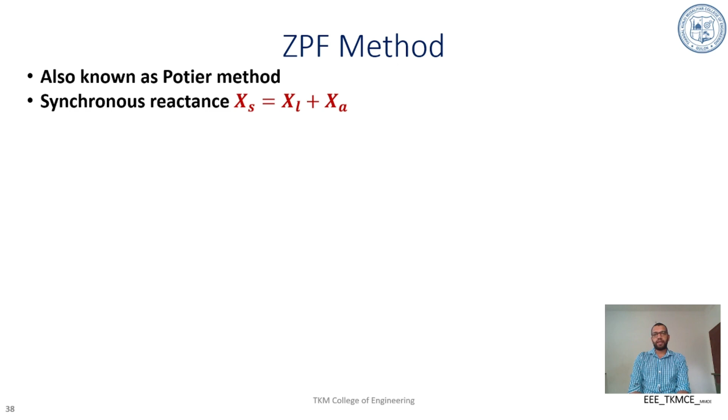We know in an alternator, armature current generates armature flux, and this entire armature flux does not link with main flux. The part of flux not linking with main flux is known as leakage flux. As armature current is time varying, leakage flux is also time varying, which induces a self-induced EMF in the armature, and this self-induced EMF opposes the actual induced EMF. Therefore, net induced EMF decreases.

Thus, leakage reactance represents an EMF concept because due to the presence of phi L, an EMF is induced. That induced EMF is N into d phi L by dt, which equals L into di by dt, which equals omega L into I. This is the induced EMF due to leakage flux, which opposes the induced EMF. This opposition creates a net reduction in induced EMF. Therefore, leakage reactance represents an EMF concept.

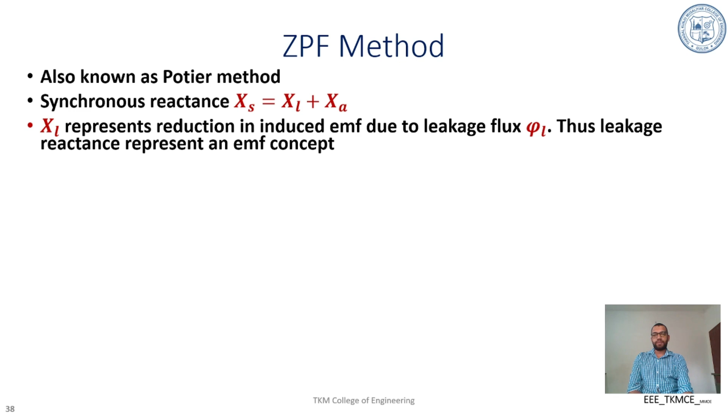XA represents a fictitious reactance to consider armature reaction effect. In motor or generator operations of a synchronous machine, armature reaction creates a voltage phasor, say EA, and that phasor EA and IA resemble the characteristics of a pure inductive coil. So armature reaction effects can be considered by means of a fictitious reactance XA.

Since the effect of armature reaction is either to increase or decrease MMF or flux under different loaded conditions depending on power factor of operation. Under lagging power factor, net flux decreases due to demagnetization. Under leading power factor, net flux increases. So the effect of armature reaction is to either increase or decrease the MMF, so XA represents an MMF concept.

Synchronous reactance of the machine contains two parts, XL and XA. XL represents EMF concept, reduction in EMF, and XA represents reduction or increase in flux, that is, XA is an MMF concept. In EMF method, XA is taken as additional leakage reactance, therefore excess synchronous reactance becomes an EMF concept. That's why this method is termed EMF method.

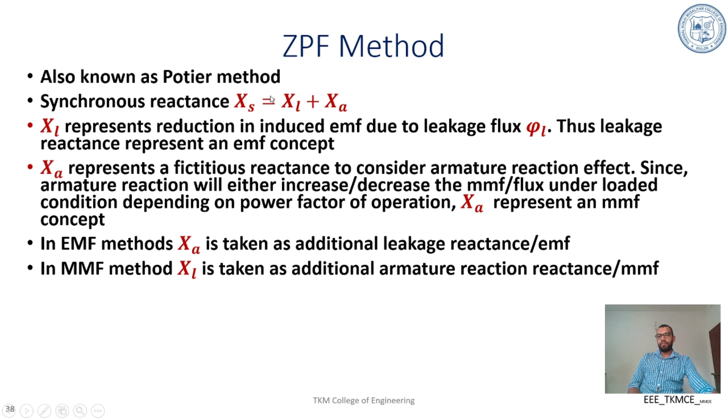But in MMF method, XL is taken as additional armature reaction reactance, therefore the excess becomes an MMF concept. But in ZPF method, we combine good aspects of EMF and MMF methods. Here, XL is treated as leakage reactance as it is, considered as an EMF concept, and armature reaction effect is considered as an MMF concept. This method separates armature leakage reactance and armature reaction reactance effectively, therefore giving more accurate results.

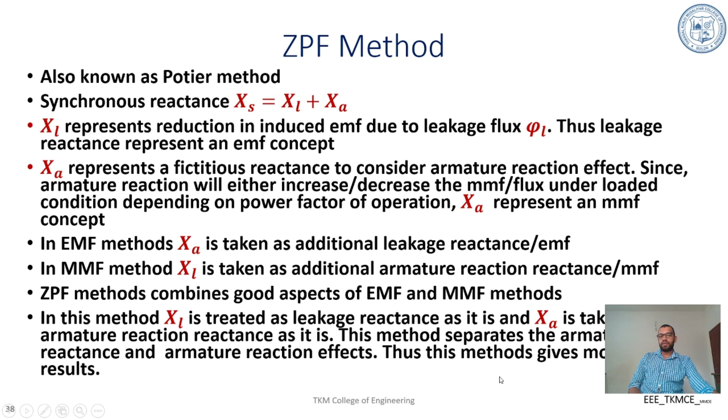Coming to the steps followed in ZPF method, we need to conduct three tests on the given machine. One is open circuit characteristics, giving variation of no load induced EMF with respect to field current at rated speed. Second test is ZPF characteristics, where we plot variation of terminal voltage with respect to variation of field current while delivering rated armature current under zero power factor load condition. The third test is to measure effective armature resistance per phase.

Based on the data available from these tests, we need to draw open circuit characteristics, ZPF characteristics, and air gap line. First, for better understanding, let's draw the phasor diagram of alternator under lagging power factor condition to generate internal induced EMF E dash. Here V is the rated terminal voltage, I is current lagging by angle phi, I into Ra which is in phase with I, into XL which is leakage reactance drop leading I by 90 degrees, and this I into XL we can directly obtain from the Potier triangle. The sum of all these voltages gives E dash.

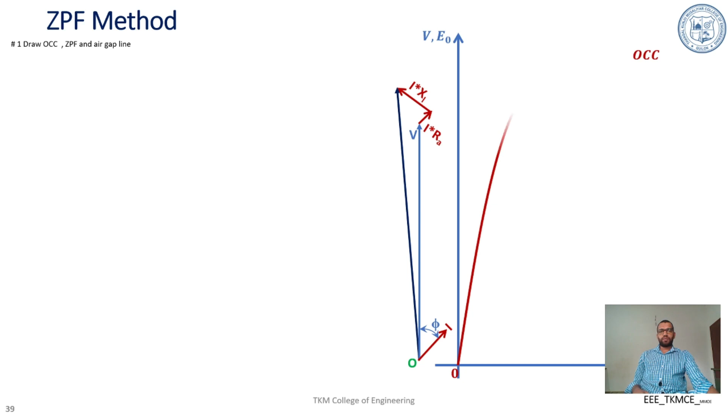Then we need to draw open circuit characteristics and ZPF characteristics. Point F is the first point of ZPF characteristics where the voltage is zero, therefore the field current corresponds to rated armature current under short circuit condition. After plotting ZPF characteristics, we draw the air gap line, which is the tangent to the initial portion of open circuit characteristics. The air gap line represents the OCC of the machine if there is no saturation.

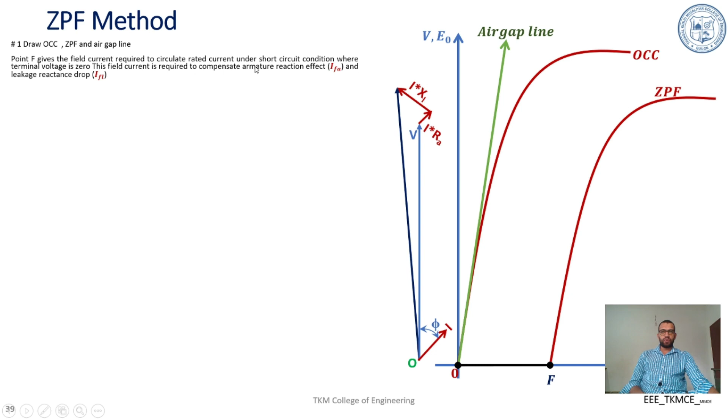As discussed, point F gives the field current required to circulate rated armature current under short circuit condition, because terminal voltage is zero. This field current OF contains two parts: one is the field current to compensate armature reaction effect, IFA, and the second part is the field current to compensate the leakage reactance drop.

The second step is to draw the Potier triangle. Corresponding to V rated terminal voltage, draw a horizontal line parallel to the x-axis which will meet the ZPF characteristics at point B. Then mark point C on this horizontal line so that BC equals OF.

Then we need to draw a line parallel to the air gap line so as to meet this line at point D on the open circuit characteristics. Then we need to join B and D so that it forms a triangle BCD.

Then from point D we need to draw a perpendicular to BC so that it meets at E. In literature, either BCD or BED is termed as the Potier triangle. We are mainly interested in this portion DE, which gives I into XL drop.

So from this Potier triangle, we can separate three components: one is I into XL, the second is this portion BE, that is the field current required to compensate armature reaction, and EC, that is field current to compensate leakage reactance drop.

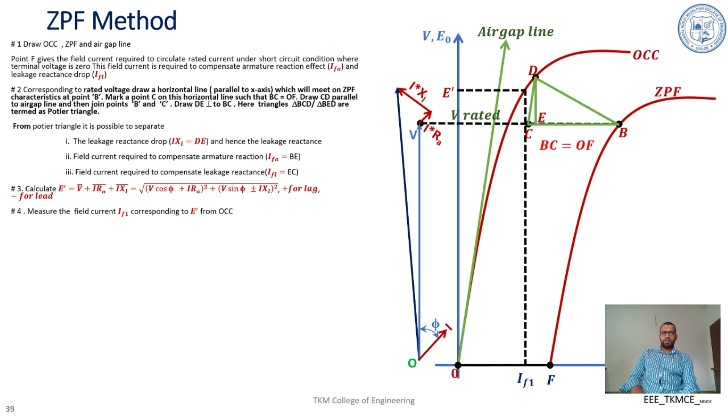Then IF2, the field current required to compensate armature reaction, is nothing but BE, which is obtained from the Potier triangle. Once we have IF1 and IF2, we can find the resultant field current IFR.

This equation we are going to derive for different power factor conditions. So once we have the resultant field current by means of these equations, we need to measure the no-load induced EMF corresponding to this IFR from the open circuit characteristics.

So mark IFR, and we need to measure the E0 corresponding to this field current. Once we have E0, we can calculate voltage regulation by means of the expression E0 minus V by V into 100. This is the procedure to be followed for all power factor conditions of operation.

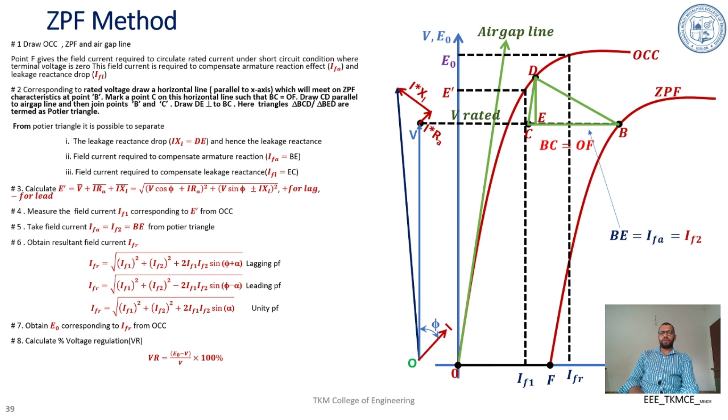Let's see the derivation of IFR and the procedure in detail for different power factor conditions of operation. First, let's discuss the lagging power factor condition.

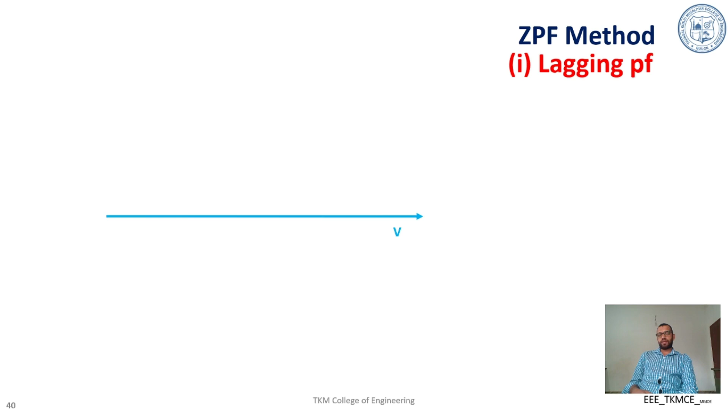We take V as the reference phasor. I lags V by an angle phi, and we need to draw all the drops, that is I into Ra and I into XL.

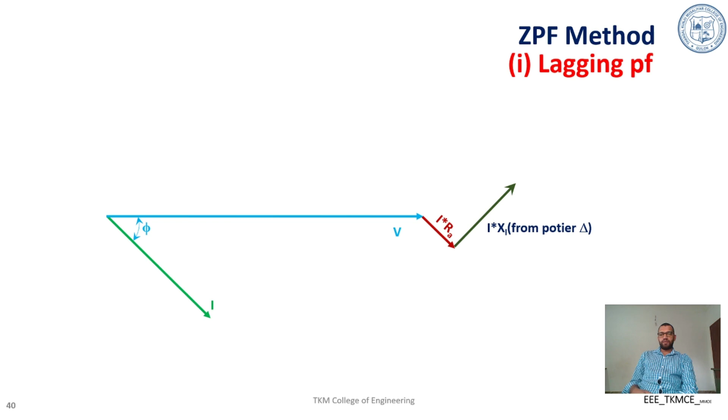This is I into Ra, which is in phase with I, and I into XL, which leads I by 90 degrees. This gives E dash. Let's say the angle between E dash and V is alpha, and IF1 leads E dash by an angle of 90 degrees.

Then under short circuit condition, the power factor of operation is zero power factor lagging, so the armature reaction effect is fully demagnetizing.

The field current required to compensate the armature reaction effect is considered as an anti-parallel phasor to I, that is IF2 is anti-parallel to I. Then we need to find the resultant field current IFR.

Now let's see the different angles. The angle between IF1 and this 90 degree line, and this angle is phi plus alpha, so it becomes 90 plus phi plus alpha. The angle between IF1 and IF2 is 90 minus phi plus alpha, so that the entire angle between I and IF2 becomes 180 degrees.

Then the angle between IF1 and IF2 is 90 plus phi plus alpha. So the angle between this phasor, which is preceded by IF1 and IF2, is 90 minus phi plus alpha.

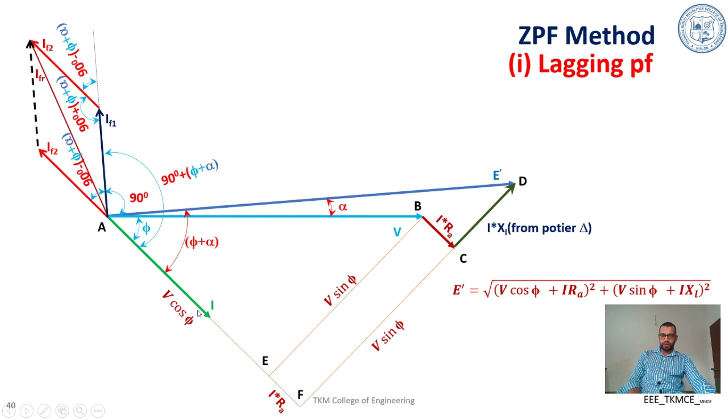Let's go through the steps in detail. First, we need to draw the open circuit characteristics. Then we need to draw the ZPF characteristics, then the air gap line. Then corresponding to V rated, mark point B on the ZPF characteristics.

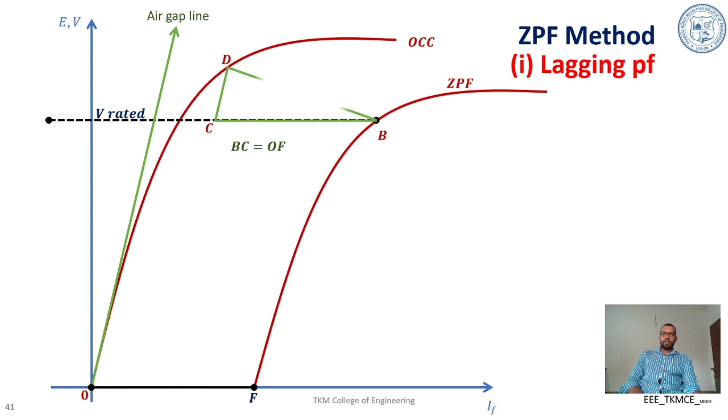Then mark C on this horizontal line so that BC is equal to OF. Draw a line parallel to the air gap line which will meet at D. Complete the Potier triangle, then draw the perpendicular bisector DE to BC. DE represents I into XL.

After getting I into XL, we need to calculate E dash. Corresponding to E dash, draw a line to find the field current to generate the internal induced EMF E dash under open circuit condition, that is IF1.

Then we need to measure IF2, which is equal to BE. After finding IF1 and IF2, IF1 is the field current required to generate E dash under open circuit condition, and IF2 is the field current required to compensate for armature reaction reactance.

The angle between IF1 and IF2 is 90 plus phi plus alpha, and this is the way to find the resultant field current.

Since this angle is 90 degrees, therefore this angle is phi plus alpha, and therefore this angle is also phi plus alpha. This phasor is IF2, therefore this projection, that is IF2 sine of phi plus alpha, and this vertical component, the adjacent component for IF2, is IF2 cos of phi plus alpha.

So IFR is equal to root of IF1 plus IF2 sin of phi plus alpha all square plus IF2 cos of phi plus alpha all square. After simplifying, we can obtain the expression for IFR as IF1 square plus IF2 square plus 2 IF1 IF2 sin of phi plus alpha. And phi plus alpha is tan inverse of V sin phi plus I into XL, by V cos phi plus I into RA.

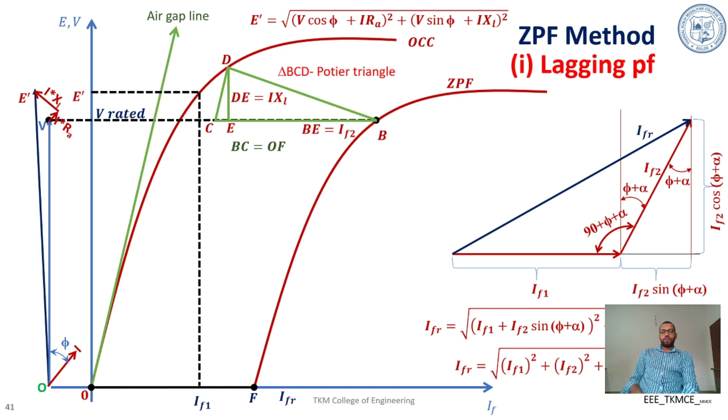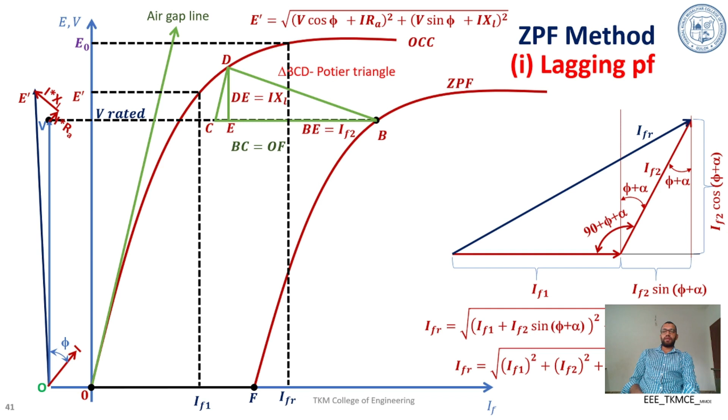So after finding IFR, we need to proceed with a line parallel to the y-axis which will meet the OCC, and measure E0 corresponding to this IFR. Once E0 is obtained, we can find the voltage regulation.

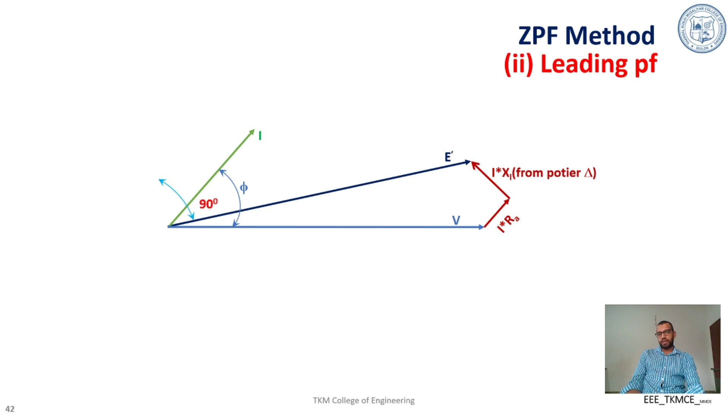The field current to generate E dash under open circuit condition is IF1, so IF1 is leading E dash by 90 degrees. Under short circuit condition, the armature reaction effect is fully demagnetizing. Therefore IF2 is drawn anti-parallel to I.

And we need to find the resultant field current likewise. The angle between E dash and V is alpha, the angle between E dash and I is phi minus alpha, and the angle between I and IF1 is 90. This angle is 90 degrees and this angle is phi minus alpha, therefore this angle is 90 minus phi minus alpha, therefore this angle is 90 plus phi minus alpha.

And the angle between the projected IF1 and IF2 is 90 plus phi minus alpha. Please note this angle between IF1 and IF2 under leading power factor is 90 minus phi minus alpha. Then we need to construct two right angle triangles, just like in the previous case, to derive the expression for phi minus alpha.

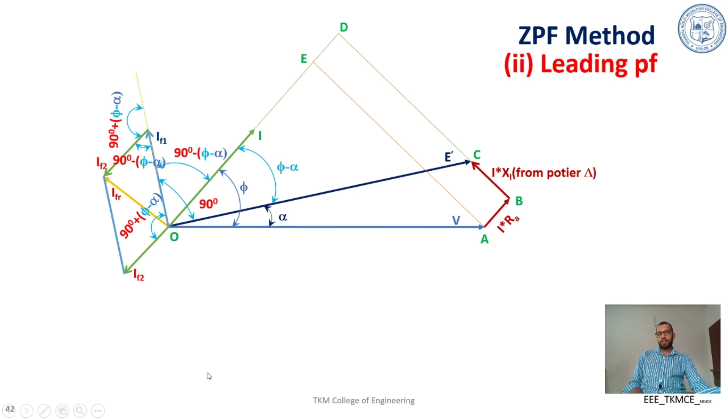Proceed with the I phasor, then proceed with the IXL phasor likewise. Then from the tip of V, draw a line which is parallel to this line. Now let's mark different points O, A, B, C, D, E. Here is the right angle triangle ODC, and here is E dash.

What is E dash? E dash is equal to OD square plus DC square. In the case of first triangle OEA, V, which is OA, is the terminal voltage and is the hypotenuse. So OE is equal to V cos phi, and AE is equal to V sin phi. Therefore, the total length BD is also equal to V sin phi.

Substituting these values in these equations, we obtain E dash equal to square root of V cos phi plus I into RA whole square plus V sin phi minus I into XL whole square. From this expression, we can calculate phi minus alpha as tan inverse of V sin phi minus I into XL divided by V cos phi plus I into RA.

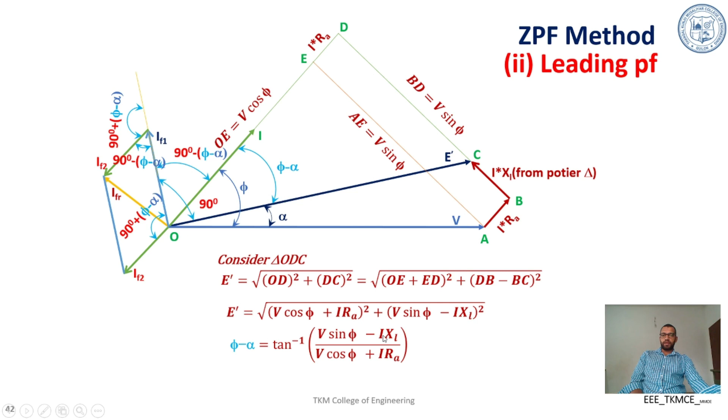These two things are required for deriving the expression for IFR. The angle between IF1 and IF2 is 90 minus phi minus alpha, and this angle phi minus alpha is tan inverse of V sin phi minus I into XL by V cos phi plus I into RA.

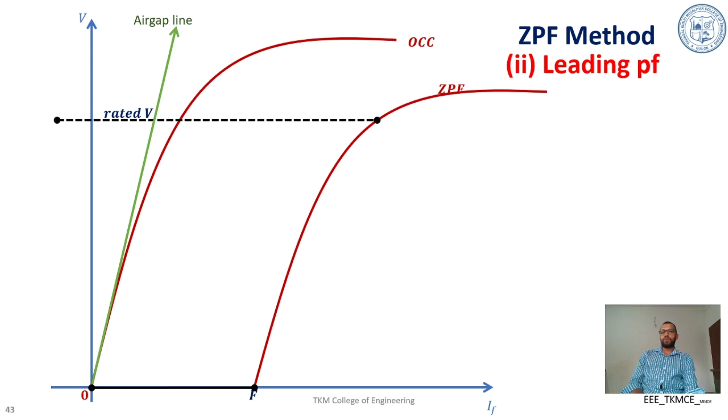Coming to the steps: first we need to draw the OCC curve, then ZPF, then the air gap line, then corresponding to rated values we need to construct Potier triangles. From Potier triangles we can obtain XL. This is the phasor diagram.

After obtaining IXL, we need to calculate E dash by means of this expression, and corresponding to E dash from the open circuit characteristics, we need to find out IF1, the field current to generate the internally induced EMF under open circuit condition. Then IF2, which we already found from the Potier triangle, is the field current to compensate the armature reaction effect.

Once we got IF1 and IF2, draw this phasor diagram. The angle between IF1 and IF2 is 90 minus phi minus alpha. This is the resultant phasor. Let's create two lines like this to derive the expression for IFR.

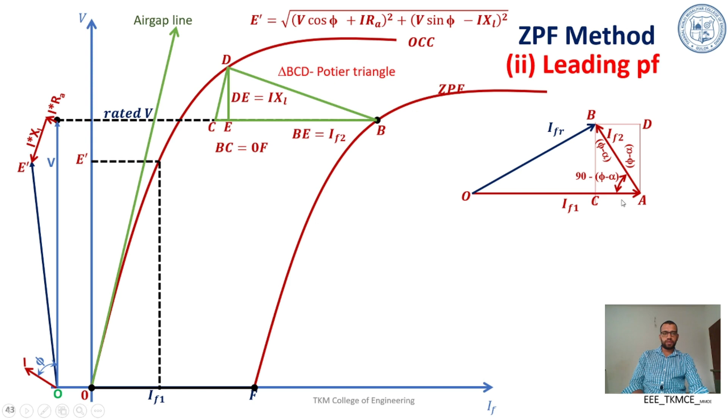Let's consider points A, C and D. Since this angle is 90 minus phi minus alpha, this angle is phi minus alpha, therefore this angle is also phi minus alpha. So AC is equal to IF2 sin phi minus alpha, and AD is equal to IF2 cos phi minus alpha. So OB is equal to square root of OC square plus BC square.

And OC is nothing but OA minus AC. After substituting all these things in these equations, we can obtain the expression as IFR square equal to IF1 square plus IF2 square minus 2 IF1 IF2 sin phi minus alpha.

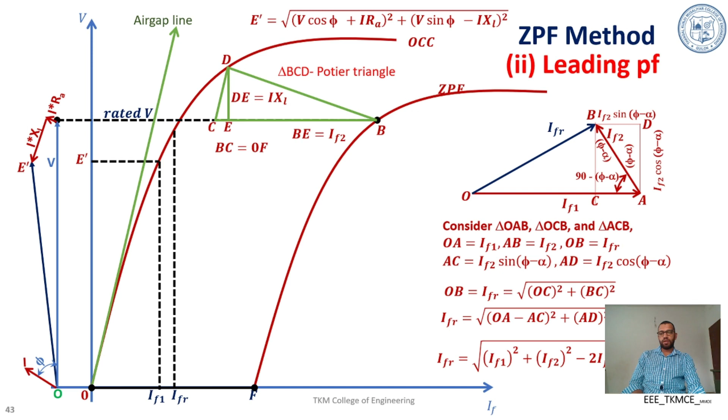Once we got the resultant field current, mark this point on the x-axis. Then find the open circuit voltage corresponding to this IFR, which gives E0. Once we got E0, we can find the voltage regulation.

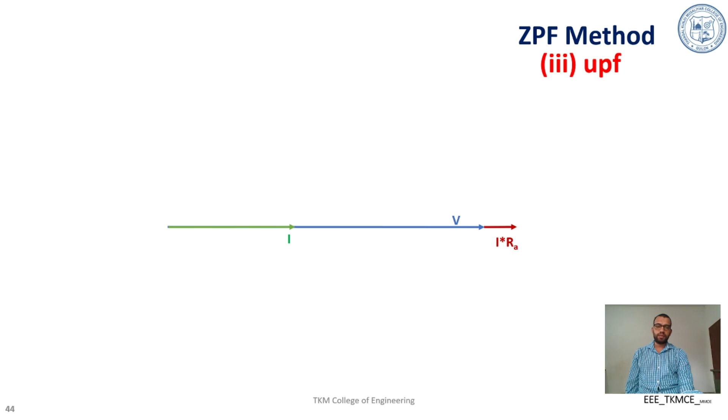Coming to the unity power factor condition, V is taken as reference, I is in phase with V. We need to draw I into RA drop, which is in phase with I, and I into XL, obtained from the Potier triangle, leading I by 90 degrees, and this is our E dash.

IF1 is leading E dash by 90 degrees, and IF2 is anti-parallel with I, and this is the resultant field current IFR. Then the angle between E dash and V is alpha, and the angle between V and IF1 is 90 plus alpha.

Then this angle is 90 minus alpha, therefore this angle, which is the angle between IF1 and IF2, is 90 plus alpha. This is very important: 90 plus alpha. Let's mark different points like O, A, B, C.

Consider triangle OBC. E dash is equal to the square root of OA plus AB all square plus BC all square. Substituting these values, E dash is equal to square root of V plus I into RA all square plus I into XL all square. Then alpha is equal to tan inverse of IXL by V plus I into RA.

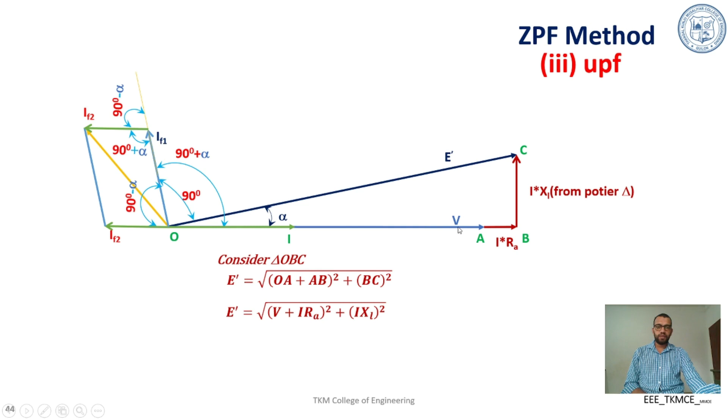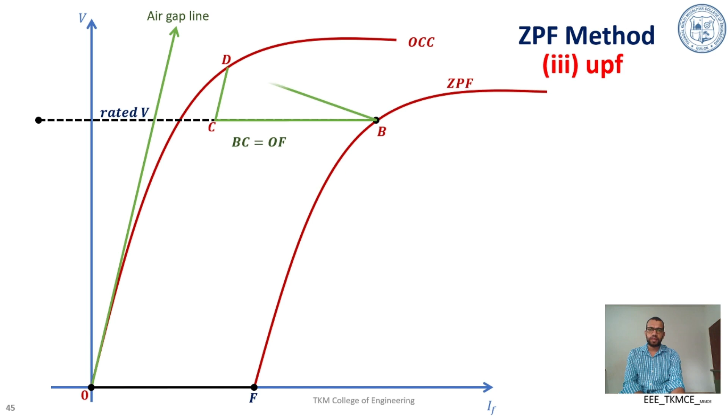Coming to the steps: first we need to draw the open circuit characteristics, then the ZPF characteristics, then we need to draw the air gap line, then we need to construct the Potier triangle to separate the I into XL drop. This is I into XL. After obtaining I into XL, we need to calculate E dash by means of this expression.

After calculating E dash, we need to find the field current to generate E dash under open circuit condition, that is IF1, and IF2 is the field current which compensates the armature reaction, obtained from the Potier triangle as BE, that is IF2.

Once we got IF1 and IF2, draw these phasors. The angle between IF1 and IF2 is 90 plus alpha. Then this is the resultant field current. Draw two lines like this in order to derive the expression for IFR.

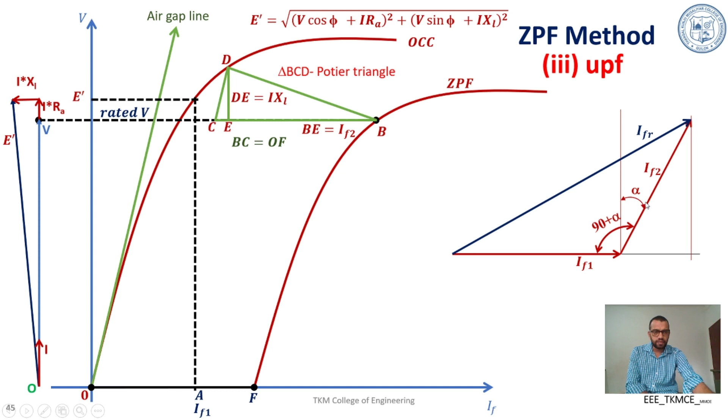This angle is alpha, therefore this angle is also alpha. Therefore this part is IF1 and this part is IF2 sin alpha, and this part is IF2 cos alpha. Therefore, IFR is equal to the square root of IF1 plus IF2 sin alpha whole square plus IF2 cos alpha whole square.

Root of IFR is equal to root of IF1 plus IF2 sin alpha whole square plus IF2 cos alpha whole square. After simplifying, IFR is equal to root of IF1 square plus IF2 square plus 2 IF1 IF2 sin alpha.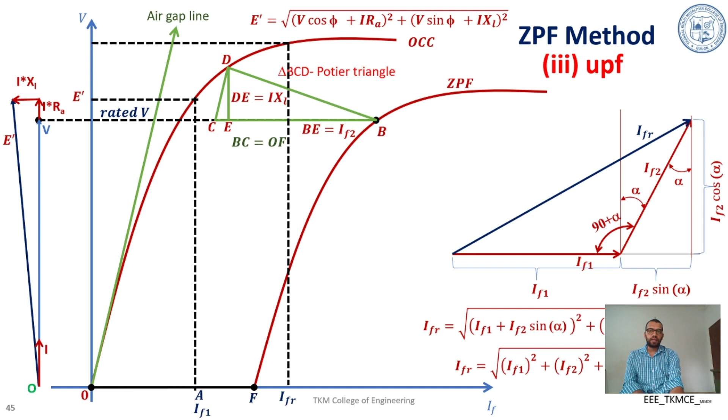Once we got IFR, we need to obtain E0 corresponding to this resultant field current, and we can calculate voltage regulation. Let's see one example of finding voltage regulation using the ZPF method.

The following data pertains to a 5000 kVA, 6600 volt, 3-phase, 50 Hz star connected alternator. They have given open circuit parameters and ZPF parameters corresponding to field currents. We need to determine voltage regulation by means of the ZPF method at full load and unity power factor. Armature resistance is taken as 0, and we need to draw the phasor diagram.

Given parameters: line value of voltage is 6600 volt, therefore the phase value of voltage is 3810.5. Power rating is 5000 kVA. From this power rating and line value of voltage, we can calculate the rated current.

The rated current is 437.39 ampere, and we need to convert the line value of voltages into phase values. This is the phase value of voltage corresponding to OCC, and this is the phase value of voltage corresponding to ZPF with respect to this field current.

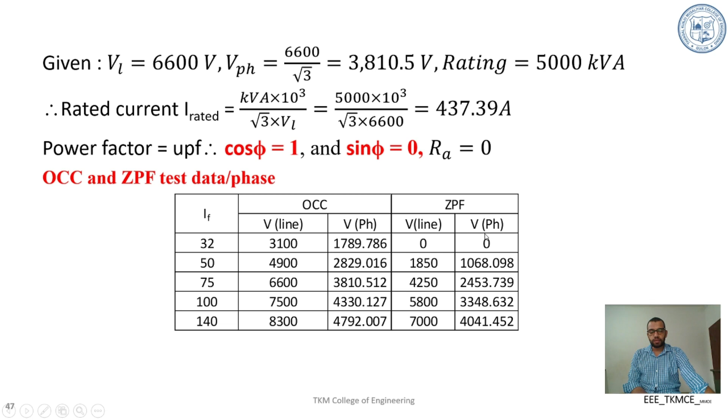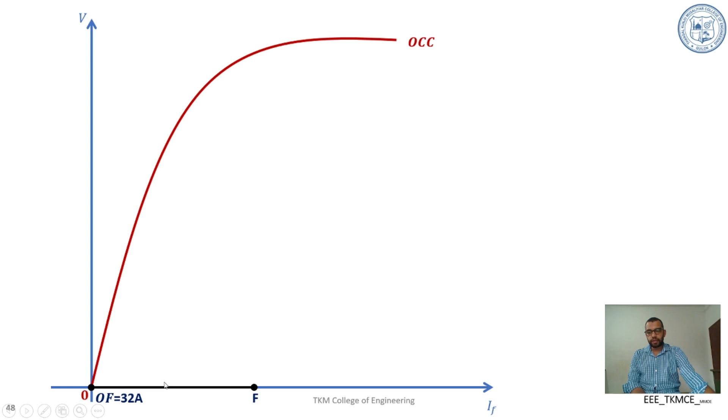The first point of the ZPF characteristics has voltage equal to 0, that is under short circuit condition. The field current required to circulate rated armature current under short circuit condition is 32 ampere. So in the OCC characteristics, the first point of the ZPF characteristic is 32 ampere, that is OF.

Then we need to draw the ZPF characteristics air gap line. Rated voltage is 3810.5 phase value. Then we need to draw the Pottier triangle.

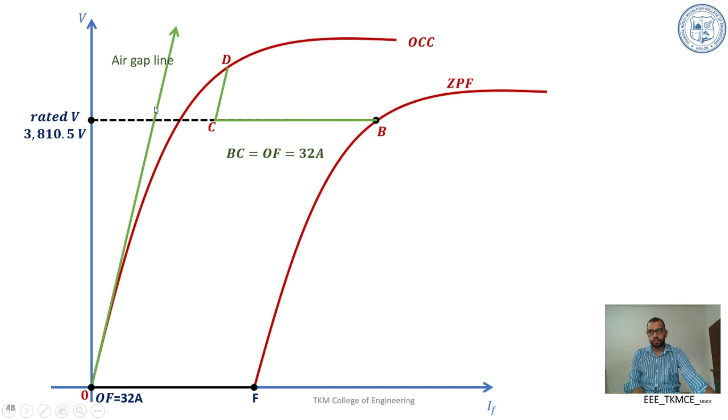BC we need to mark as 32 ampere. Then from point C, draw a line parallel to the air gap line and complete the Potier triangle. Then draw the perpendicular from D to BC. That gives I into XL.

So I into XL is obtained as 534.12. Once we got I into XL, we can calculate the internal induced EMF E dash by means of this expression, and it is obtained as 3847.75.

The next step is to find out IF1, that is the field current required to generate E dash, the internal induced EMF, under open circuit condition. We need to extend one line from E dash corresponding to this value to get IF1, and IF1 is obtained as 76.375 ampere.

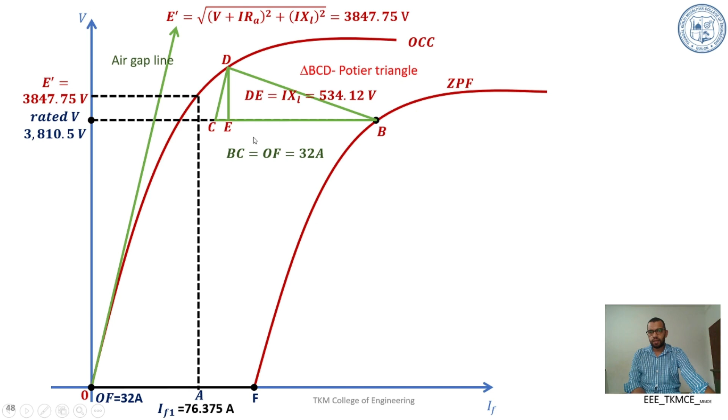IF2 is nothing but the field current to compensate the armature reaction effect, that is BE, and BE is obtained as 22.25 ampere. So once we got IF1 and IF2, we can calculate the resultant field current.

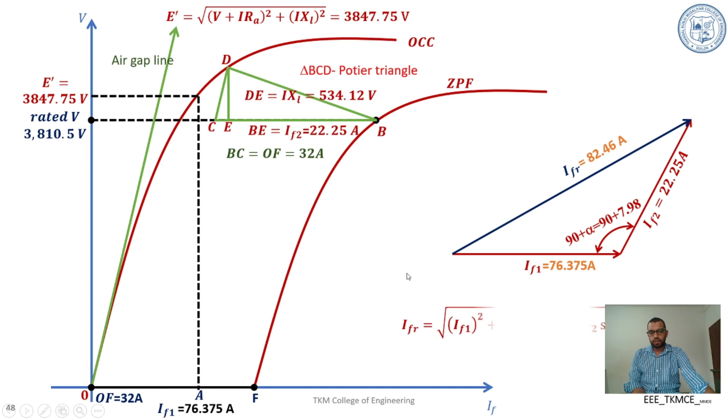Resultant field current: how to calculate alpha is explained in the next slide. So once we got IFR, it is obtained as 82.46 ampere by means of this expression.

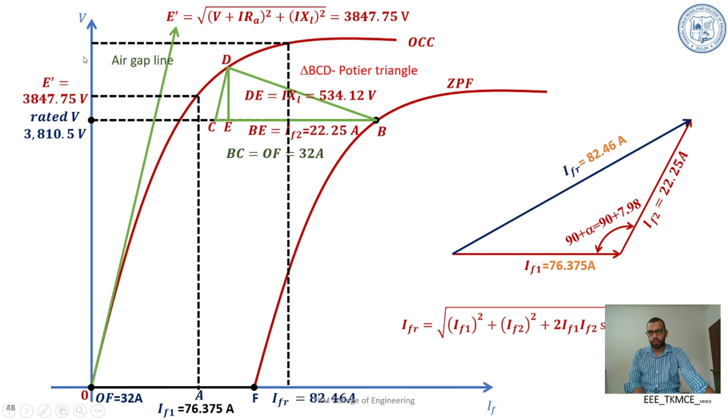Once we got IFR, we need to extend a line from IFR so that it will meet the OCC. The corresponding value of phase value of no load induced voltage gives the no load induced EMF E0. Here E0 is obtained as 4000 volt.

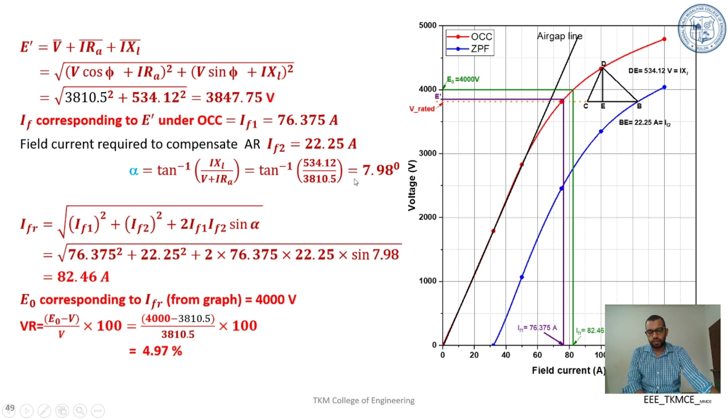Proceed a line parallel to the y-axis which will meet the OCC, and the corresponding voltage is obtained as 4000. So voltage regulation is obtained by substituting E0 and V in this expression. The voltage regulation obtained by the ZPF method under unity power factor full load condition is 4.97%.

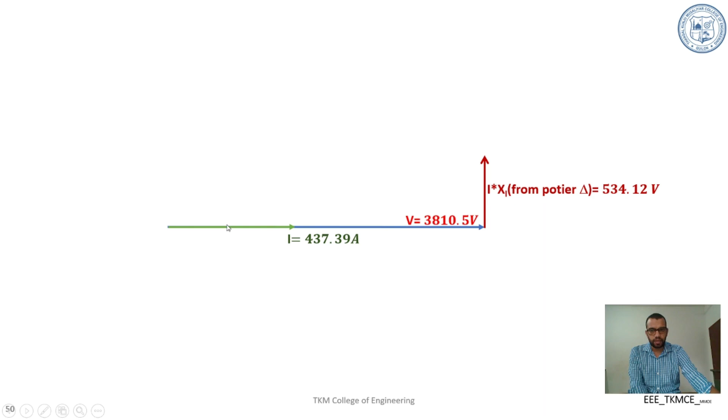Coming to the phasor diagram, V is taken as the reference phasor. I is in phase, equal to 437.39 ampere. Then IXL, which is obtained from the Potier triangle, is 534.12, leading I by 90 degree.

Since RA is not there, because RA is 0, this gives E dash. E dash is obtained as 3847.75 volt.

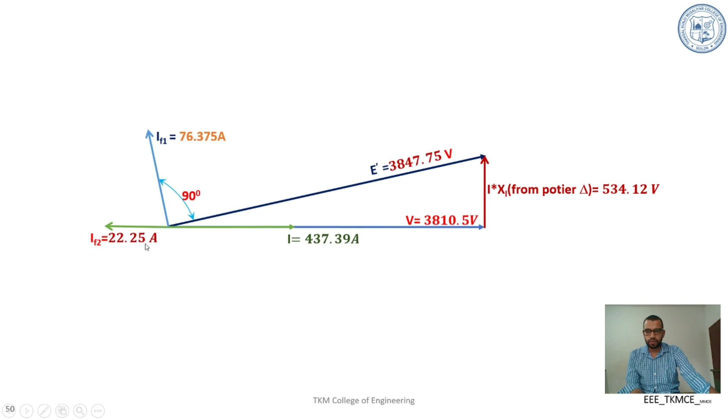Alpha is obtained as 7.98 degree. So once we got all these things with respect to IFR, we can draw the E0 phasor, around 90 degrees with respect to IFR. This phasor between E0 and E dash is nothing but I into Xa, and the total drop from A to this is I into Xs. So this is the phasor diagram of this problem.

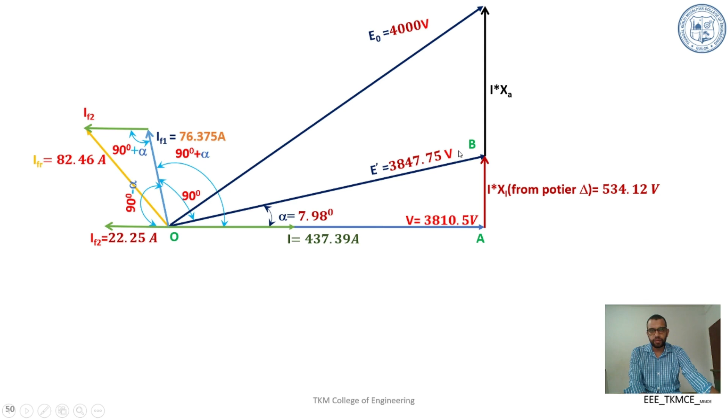Coming to the next method of finding voltage regulation, that is the ASA method. ASA stands for American Standard Association. So far we discussed EMF, MMF and ZPF methods. The EMF method gives more voltage regulation than the actual value, therefore it is termed the pessimistic method. The MMF method gives less voltage regulation than the actual.

Therefore this method is termed as optimistic method. Among these three methods, ZPF method gives better result for turbo alternator, that is non-salient pole alternator, as it effectively separates

MMF and EMF components, that is leakage reactance and armature reaction MMF, in effective manner. In all these three methods, we do not consider saturation effect of the magnetic circuit. In ASA method, saturation effect of the magnetic circuit is considered effectively, and it is the combination of good aspects of MMF and ZPF method.

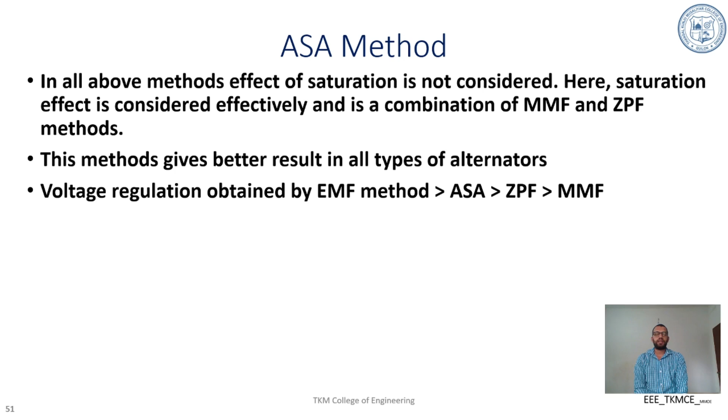This method gives better result in all types of alternator. It is to be noted that voltage regulation obtained by EMF method is greater than that of ASA method, and that of ASA method is greater than that of ZPF method, and voltage regulation obtained by ZPF is greater than MMF method. Very low value is obtained in MMF and greater value is obtained in EMF method.

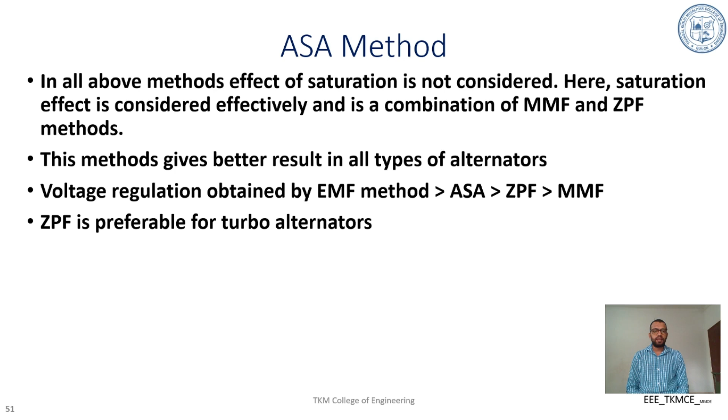ZPF is preferable for turbo alternator. In salient pole machine, ZPF method gives more error. In that case, we can use ASA method for finding out voltage regulation.

Coming to the steps to be followed in ASA method. Just like in ZPF method, we need to conduct ZPF characteristics, OCC characteristic, and we need to measure armature resistance per phase. The first step is plot OCC, ZPF and air gap line. After that, we need to construct Potier triangle to obtain IXL drop, that is leakage reactance drop.

Then the third step is to obtain field current corresponding to V rated from OCC without considering saturation, that is up to air gap line. This field current is IF1, corresponding to V rated. Proceed a line parallel to the x-axis which will meet at air gap line, then proceed downward, that gives IF1.

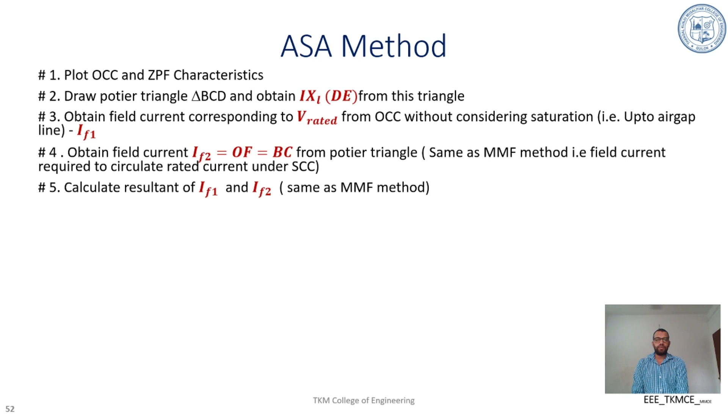Then the fourth step is to obtain field current IF2, which is exactly same as that of MMF method, that is field current to circulate rated armature current under short circuit condition. Here it is equal to OF. Then find out the resultant of IF1 and IF2 based on the method we followed in MMF method.

That is, IFR dash is equal to square root of IF1 square plus IF2 square plus or minus 2 IF1 IF2 sin phi, plus for lagging power factor and minus for leading power factor.

After that, we need to calculate internal induced EMF E dash by means of this expression: root of V cos phi plus I Ra all square plus V sin phi plus or minus IXL all square, plus for lagging and minus for leading power factor.

The seventh step is to measure the field current distance IF dash between air gap line and OCC corresponding to E dash. Then obtain the resultant field current IFR, which is equal to IFR dash plus IF dash. Here IF dash considers the saturation effect of the magnetic circuit.

Then corresponding to this IFR, from OCC we need to find out E0. Once we got E0, we can calculate voltage regulation by means of this equation.

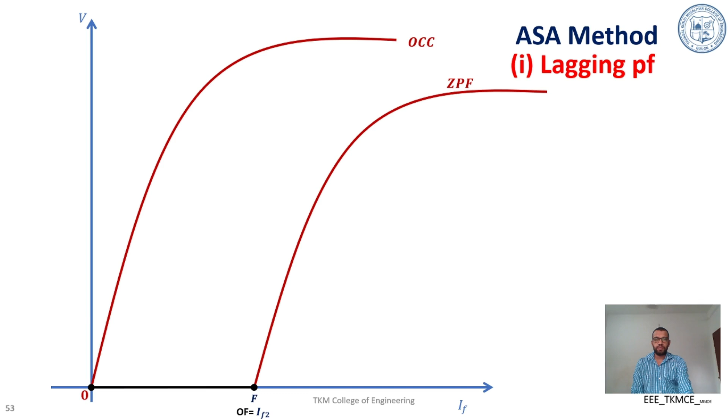Coming to the lagging power factor of operation, first of all we need to plot OCC, then the first point of ZPF characteristic, that is OF, which is equal to IF2. Then we need to plot ZPF characteristics. Then we need to draw the air gap line.

Then we need to construct Potier triangle corresponding to rated voltage, just like in ZPF method, so that we can obtain DE. DE gives IXL. Then corresponding to rated voltage, proceed a line parallel to x-axis which will meet at air gap line at point G, then proceed downward. That field current is known as IF1.

Now we can have IF1 and IF2. IF2 is OF, the first point of ZPF characteristics. Once we got IF1 and IF2, we can find out the resultant field current IFR dash, just like in MMF method. The angle between IF1 and IF2 is 90 plus phi.

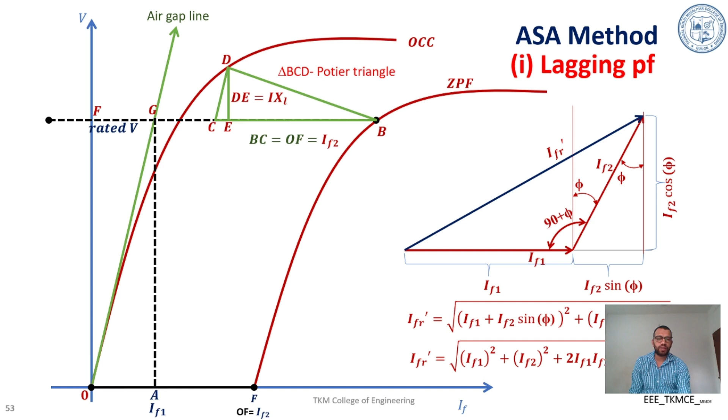This is the resultant field current IFR dash, and we can draw two vertical lines and some lines like this in order to derive the expression for IFR dash. So IFR dash is equal to root of IF1 plus IF2 sin phi all square plus IF2 cos phi all square. By simplification, we can have this expression: IFR dash is equal to root of IF1 square plus IF2 square plus 2 IF1 IF2 sin phi.

Then we need to calculate internal induced EMF E dash by means of this expression, and proceed a line parallel to x-axis which will meet at air gap line and OCC, and measure the gap between air gap line and OCC, that is KL. This gives IF dash.

Then IF dash is added with IFR dash in order to obtain resultant field current, that is IFR is equal to IFR dash plus IF dash. Then corresponding to this resultant field current, extend upward so that it will meet at OCC and measure the no load induced EMF E0.

Then we can calculate voltage regulation. Coming to leading power factor of operation, first of all we need to draw open circuit characteristic, then ZPF characteristics, then air gap line. Then corresponding to rated voltage we need to construct Potier triangle in order to obtain IXL drop. After that, corresponding to rated voltage, we need to measure the gap between y-axis and air gap line, that is FG, that gives IF1.

And BC is equal to OF, that is field current required to circulate rated armature current under short circuit condition, is taken as IF2. Then we need to draw the phasors IF1 and IF2. The angle between IF1 and IF2 is 90 minus phi. This is the resultant field current IFR dash.

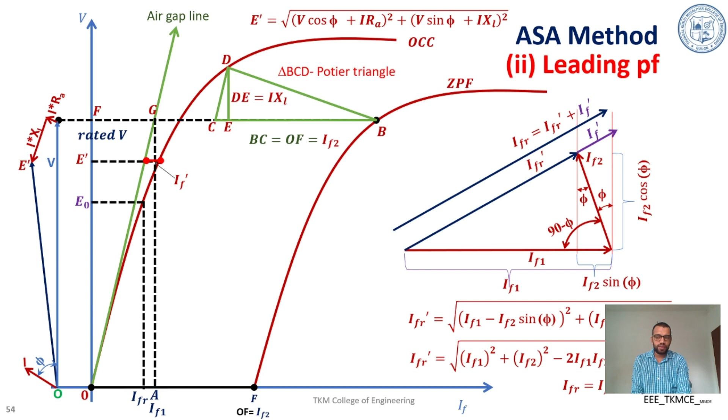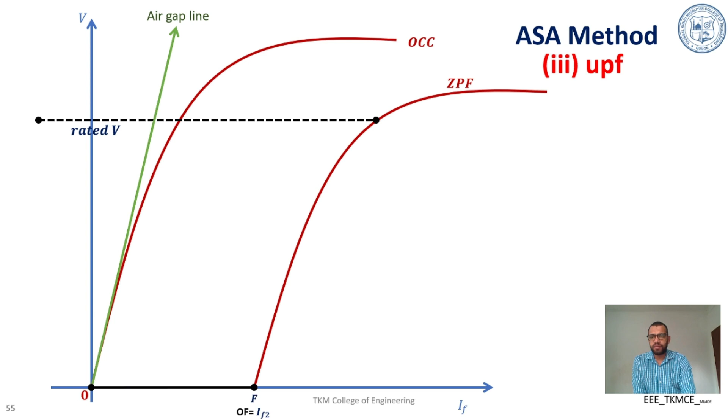Coming to unity power factor condition, first of all we need to draw the open circuit characteristics, then ZPF characteristics, then air gap line. Then corresponding to rated voltage, we need to construct Potier triangle in order to separate IXL drop. After that, corresponding to rated voltage, we need to measure the gap between y-axis and air gap line.

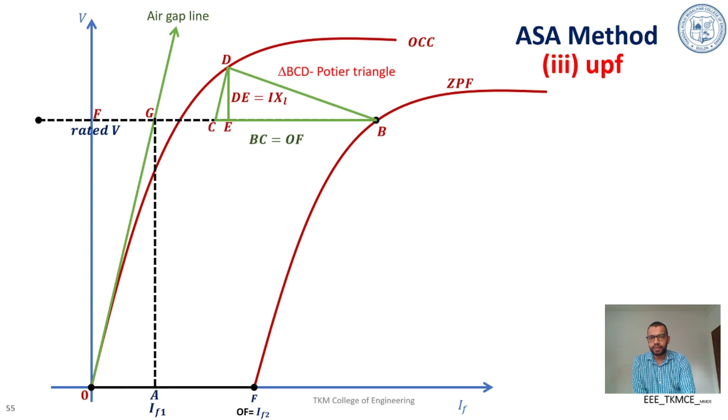That gives IF1, and IF2 is same as that of the MMF method, that is OF, the field current required to circulate rated armature current under short circuit condition. After obtaining IF1 and IF2, we can draw the phasors IF1 and IF2 in order to find out the resultant field current. The angle between IF1 and IF2 is 90 degree.

This is the resultant field current and it is obtained as root of IF1 square plus IF2 square. After obtaining IFR dash, we need to calculate internal induced EMF E dash by means of this equation and proceed parallel to x-axis. The gap between air gap line and actual OCC is KL. That gives the saturation effect.

Consider this as IF dash. Once we got IF dash, we can calculate the resultant field current. The resultant field current IFR is the sum of IFR dash and IF dash, and corresponding to this resultant field current, we need to measure open circuit voltage. That gives E0. Once we got E0, we can calculate voltage regulation.

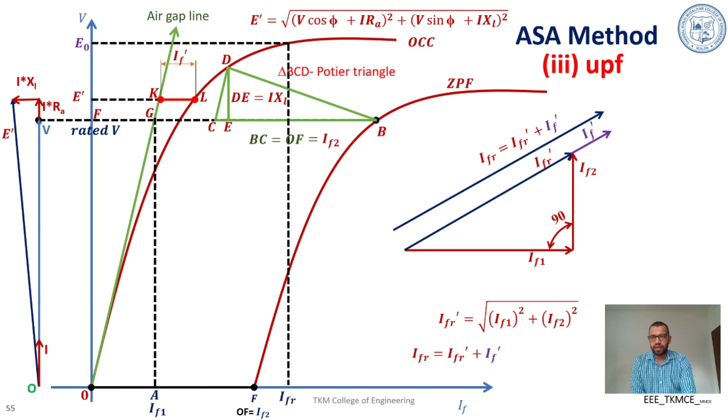Let's calculate the voltage regulation of a 10 kVA, 440 volt, 50 Hz, 3-phase star connected alternator. The machine is having the open circuit test data as below. Here the no load induced EMF is given in line values. With full load zero power factor, the excitation required is 14 ampere to produce 500 volt terminal voltage.

This is one point in the ZPF characteristics. Under ZPF characteristics, corresponding to 14 ampere, the terminal voltage is 500 volt. On short circuit, 4 ampere excitation is required to produce full load current. This gives the field current to circulate rated armature current under short circuit condition.

This is the first point in ZPF characteristics. We need to determine the full load voltage regulation at 0.8 power factor lagging using MMF method, ZPF method and ASA method, and we need to compare the results. Here we are assuming RA is equal to 0.22 ohm per phase.

Coming to the solution, here the line voltage is 440 volt, that we need to convert into phase value. Phase value is 254.03 volt. Rated current can be calculated from power rating and line value: rated current is equal to 10 into 10 raised to 3 divided by root 3 into 440 volt, and it is coming as 13.1216 ampere. This is the OCC characteristics after converting line values into phase values.

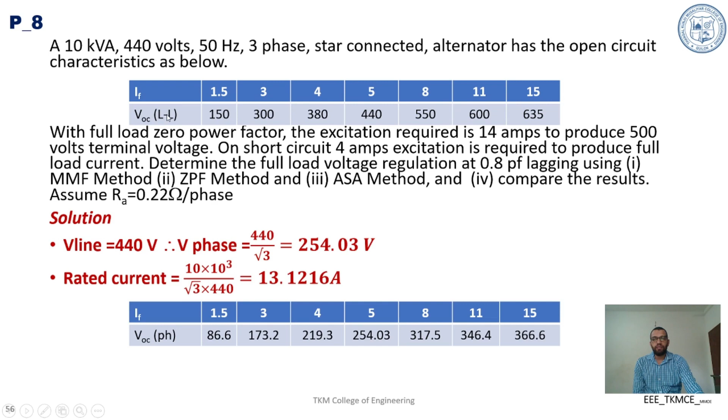Let's solve this problem firstly using the MMF method. After suitably selecting the scale, the first step is to draw the open circuit and short circuit characteristics. Here, on the x-axis, field current is taken as 1 division is equal to 1 ampere. For open circuit characteristics, y-axis 1 division is taken as 15 volt. For short circuit characteristics, 1 division is equal to 5 ampere. After selecting this scale, this is the OCC and SCC characteristics.

Then we need to calculate E dash, which is equal to V plus I into RA cos phi. V is 254.03, I is 13.1216, RA is 0.22 ohm, and cos phi, the power factor, is 0.8. Substituting these, E dash is equal to 256.34.

Mark this 256.34 on the y-axis. Draw a line parallel to x-axis which will meet the OCC and proceed downward. That gives the field current to generate E dash under open circuit condition.

That is, IF1 is obtained as 5.1 ampere. Then IF2 is the field current required to circulate rated armature current under short circuit condition, and IF2 is given as 4 ampere. Once we got IF1 and IF2, we need to calculate resultant field current by means of this expression. As cos phi is 0.8, sin phi is 0.6.

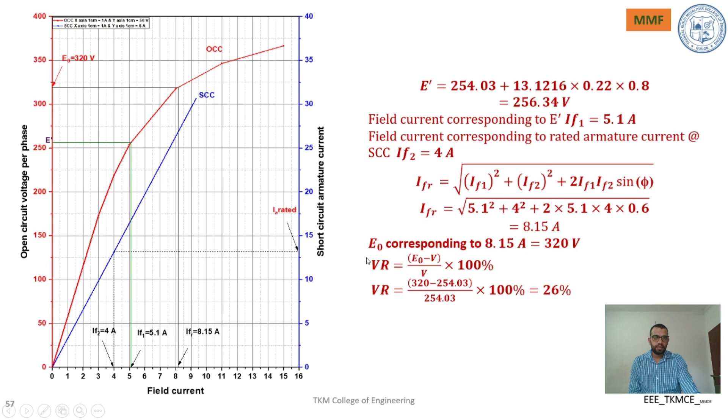Voltage regulation obtained by ZPF method is greater than that of MMF method. The third method to solve this problem is ASA method. Here we need to plot open circuit characteristics, ZPF characteristics and air gap line. And similar to ZPF method, we need to construct Potier triangle to obtain IXL drop.

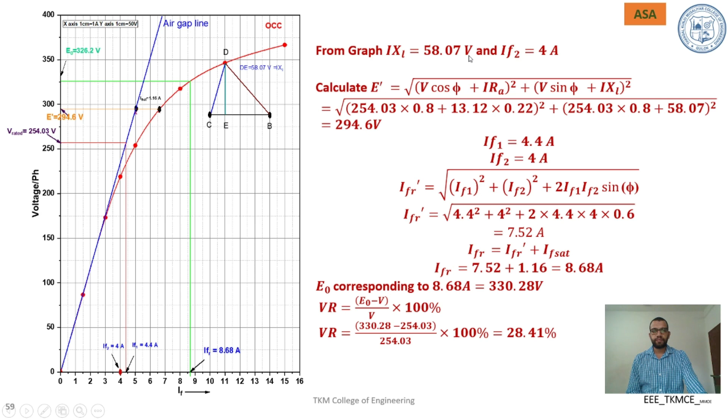From graph, IXL drop is obtained as 58.07 volt and IF2 is same as that of MMF method, that is equal to 4 ampere. This is the field current to circulate rated armature current under short circuit condition. Then corresponding to rated voltage, proceed a line parallel to x-axis up to air gap line, then proceed downwards from this meeting point. That current gives IF1.

Once we got IF1 and IF2, we can calculate IFR dash using this expression. Since cos phi is equal to 0.8, sin phi is equal to 0.6. Substituting these values, IFR dash is obtained as 7.52 ampere. In order to consider saturation effect of the magnetic circuit, we need to calculate internal induced EMF using this expression, substituting the value of IXL, which is obtained from Potier triangle, and this value of E dash is obtained as 294.6 volt.

Corresponding to 294.6 volt, that is E dash, proceed a line parallel to x-axis which will meet at air gap line and OCC and measure the gap between this meeting point. That gives I saturated or IF dash. Then IFR, resultant field current, is the sum of IFR dash and IF saturated, and IF saturated is obtained as 1.16 ampere.